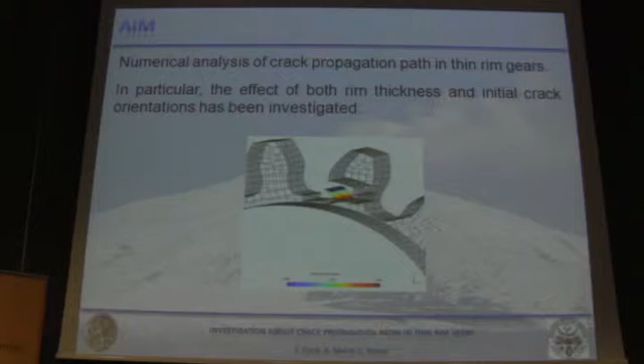This work deals with an investigation about the crack propagation path in thin rim gears in order to approach the fail-safe design. In particular, the effect of some geometrical parameters is investigated.

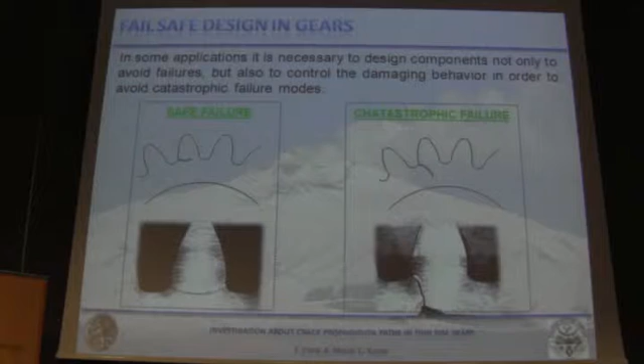Fail-safe design is a design approach where if a failure occurs, the failure should be as safe as possible. If we apply this method to design gears, in particular thin rim gears, we have two possible failure modes.

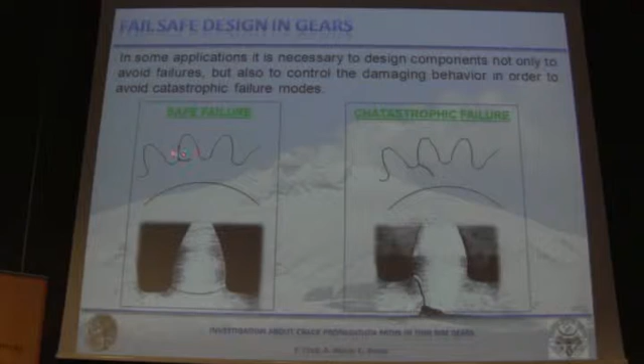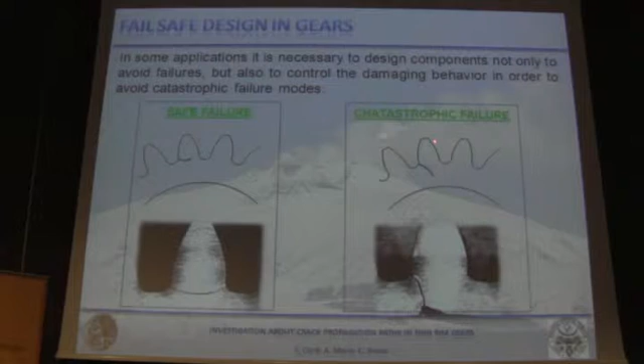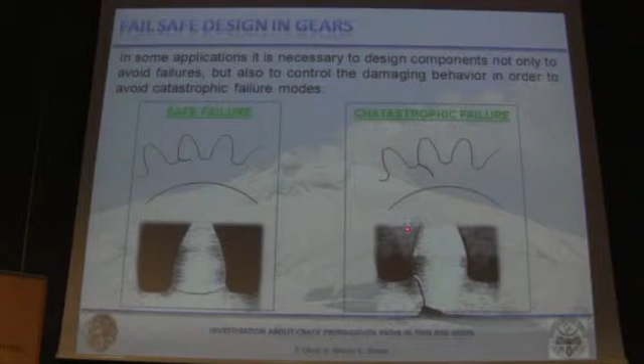The first one is the crack propagates throughout the tooth, and at the end the tooth is removed. The catastrophic failure mode is the crack growth through the rim, and in this way a big part of the wheel may be projected, and this may cause very big damage.

Here at the bottom you can see two images from the literature about experimental tests.

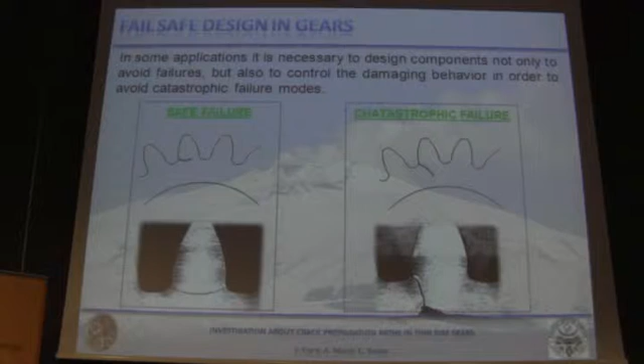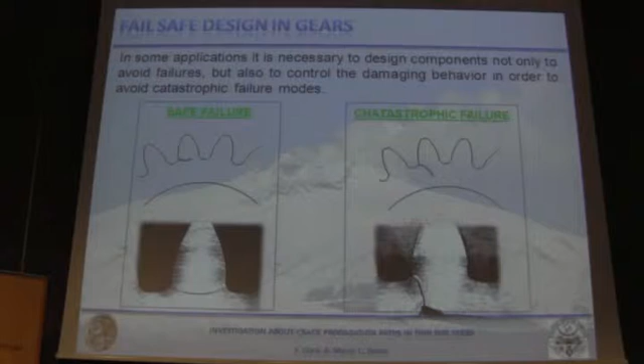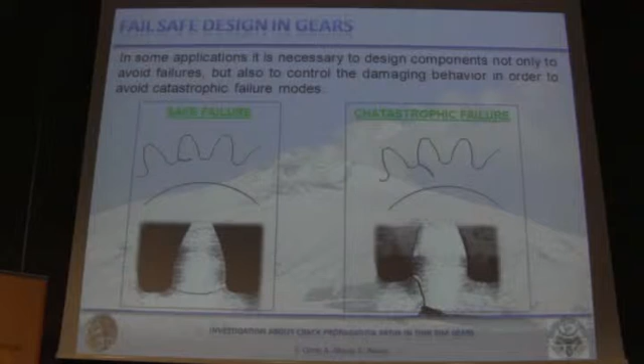Thin rim gears are particularly used in aerospace application because in aerospace field the weight is very important. So gear makers try to remove as much material in order to decrease the weight.

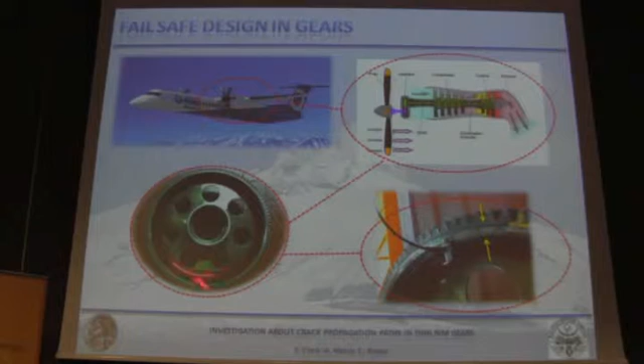Because maybe not everybody knows that in airplanes there are many gears, and they play a very important role. I give you just two quick examples. The first one is this gear.

This gear has about 300 millimeter pitch diameter and has this very little rim thickness, about less than 10 millimeters. This gear is mounted in this gearbox. In this gearbox power the propeller of this airplane.

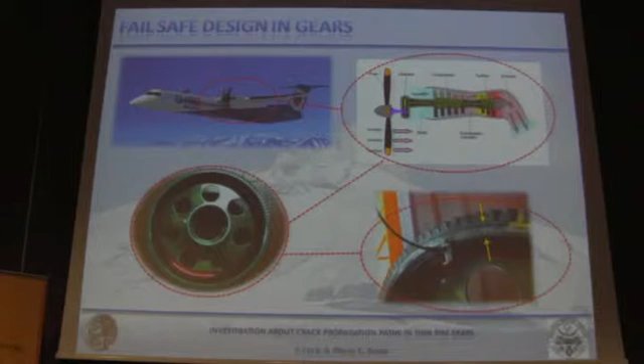Another example is the new generation low emission and low fuel consumption engine, the so-called geared turbofan. This is a turbofan engine with a very big fan, and the connection between the turbo machine and the fan is allowed by a reduction gearbox, this one.

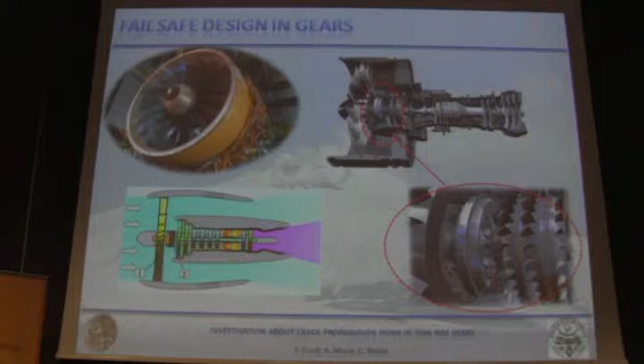So in airplane engine and also in a helicopter engine we have to pay attention to the gears failure mode.

Coming back to this work, the main parameters influencing the crack propagation path are the rim thickness, the web thickness, the initial crack position. The initial crack position may change according to the gear speed.

Generally speaking, if the wheel speed increases, the nucleation point becomes lower, going from the bottom to the tooth root to the downside of the tooth root. And also the crack orientation may affect the crack path.

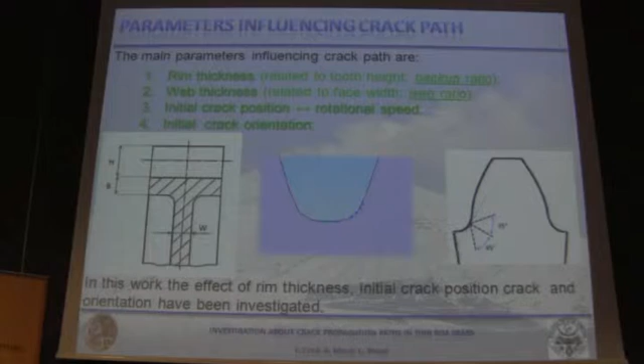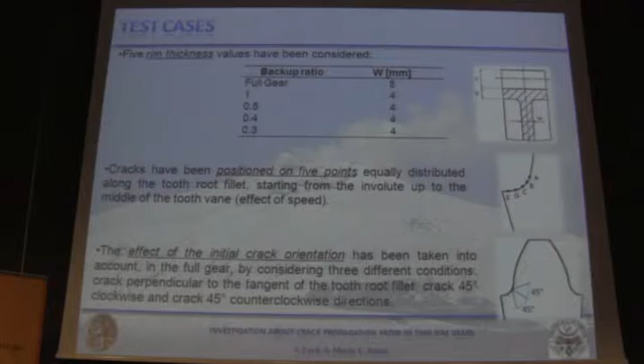In this work, only the rim thickness and the initial crack position and crack orientation have been investigated. So, concerning rim thickness, the rim thickness and the web are both related to the gear dimension.

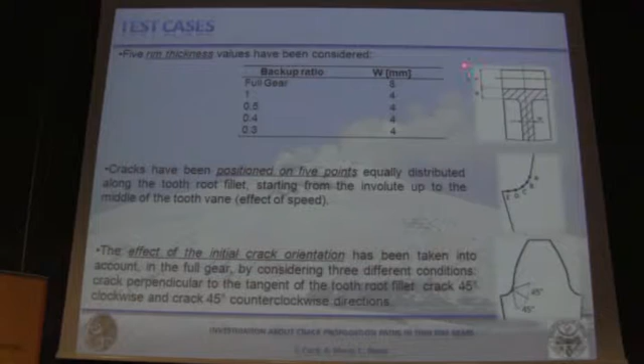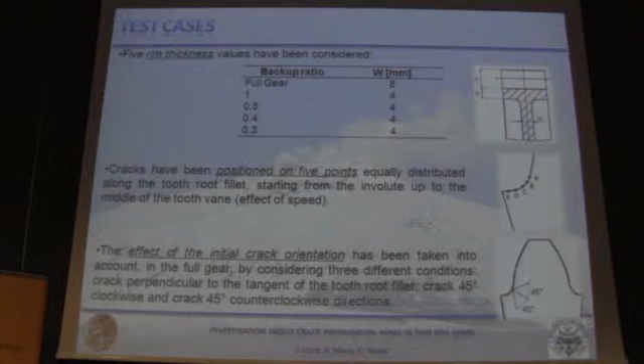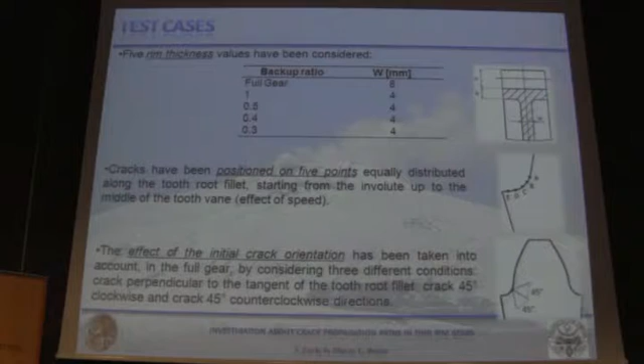In particular, the rim thickness is related to the tooth height, because this geometrical effect influences the gear relatively to the other dimensions. I mean, we can't say that 10 millimeters rim thickness is too much or too low. It depends also on the tooth height and on the other gear parameters.

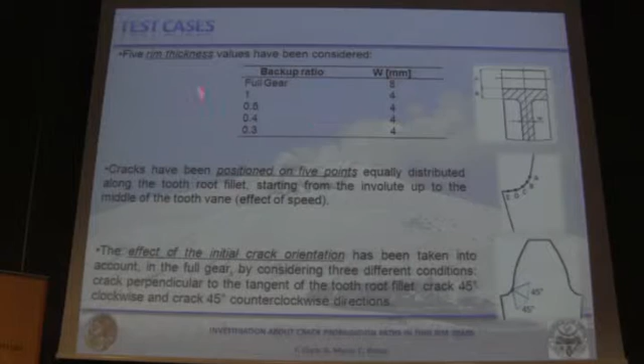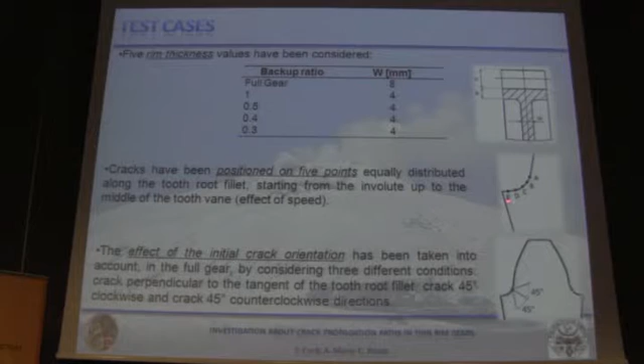So we consider 5 rim thicknesses with 2 web thicknesses, 5 initial crack points, and 3 initial crack orientations.

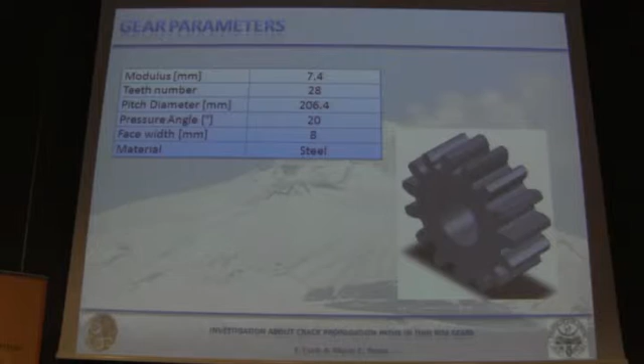So this is the test gear. It's a little gear, 28 teeth, about 200 pitch diameter, and this investigation has been done with the XFEM method.

XFEM stands for extended finite element method. The extended FEM consists in elements with enriched shape functions. This method was invented, we can say, more or less 10 years ago, and now some commercial codes implement this new approach.

The main advantages compared to the classical FEM method are that the crack is, we can say, mesh independent, because the crack may grow through the middle of two nodes. So we don't care about the position of each node, because the crack may cut the element. We don't need to remesh at every calculation step, and we don't need to mesh the crack tip with particular elements.

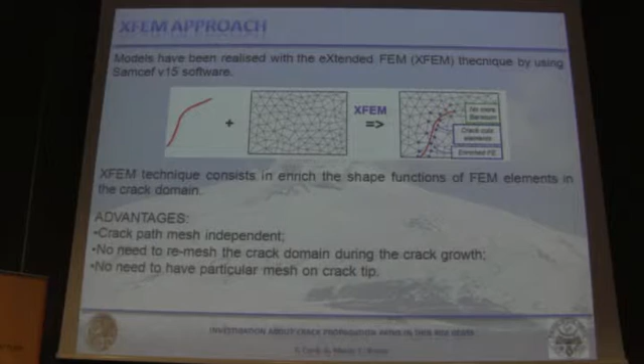Just a quick view about the model creation. We start from a traditional FEM model. We have the gear already meshed with the loads and the boundary conditions assigned.

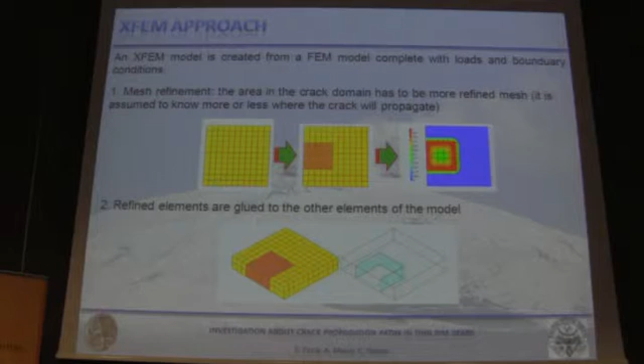Then we make a mesh refinement in the region we suppose that the crack will grow. Then the new elements are glued with the other elements.

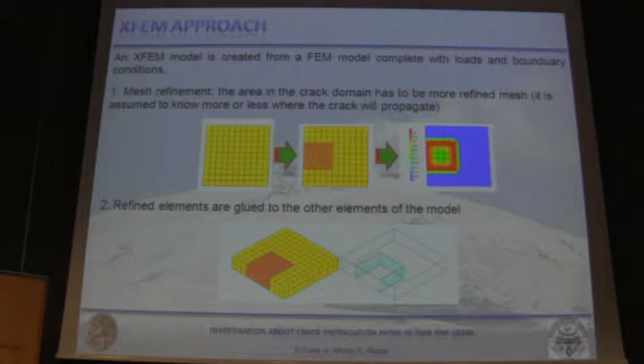Then we insert the initial crack. In the software we used Samcef, Siemens Samcef, it is possible to insert a rectangular crack or elliptical crack. Then we define the enrichment radius, and at the end we check the model and we can run the simulation.

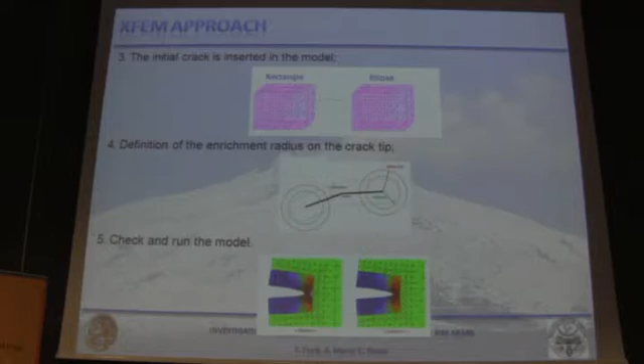Then the boundary condition: we clamped the internal diameter of the wheel, and we applied a force distributed on the tooth width, located at the pitch diameter.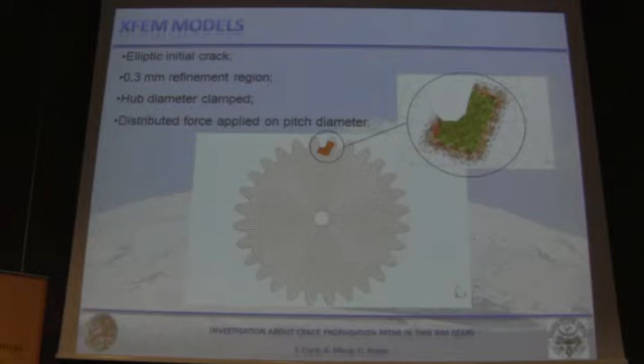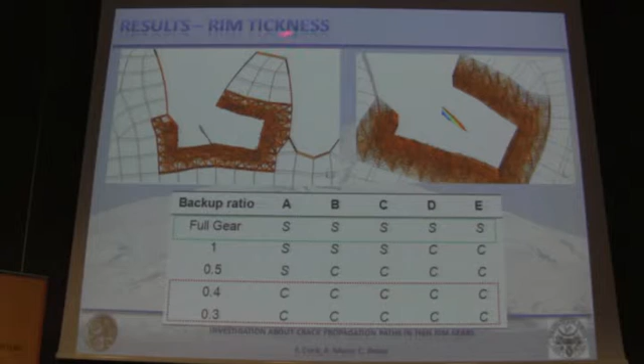Okay, here are some results. Considering the rim thickness, in this table S stands for safe failure and C for catastrophic failure. Here you can see the catastrophic failure path, so the crack growth through the rim. Here an example of safe failure, the crack grows through the tooth.

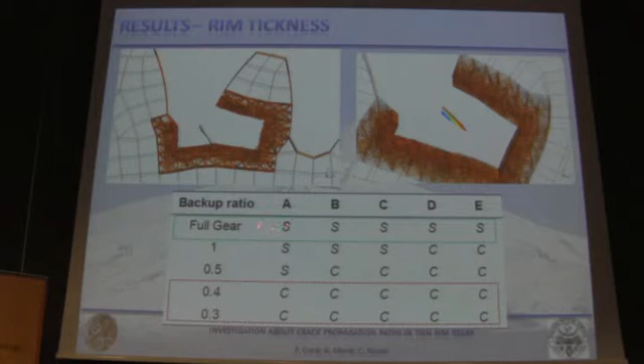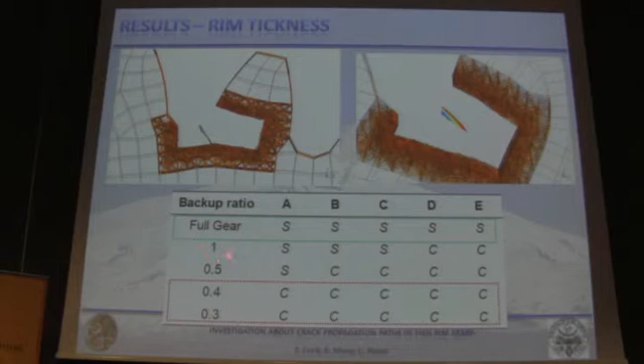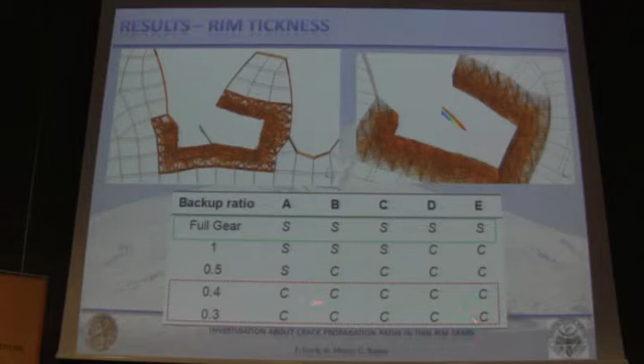So in this table, A, B, C, D, and E are the initial crack positions, and here you can see the backup ratio, that is the ratio between the rim thickness and the tooth height. What we can see is, if we consider the full gear, so the entire gear, the crack growth always through the tooth. If the rim thickness decreases, the failure mode depends according to the initial crack position, and if we consider a very thin rim, the crack always goes through the rim.

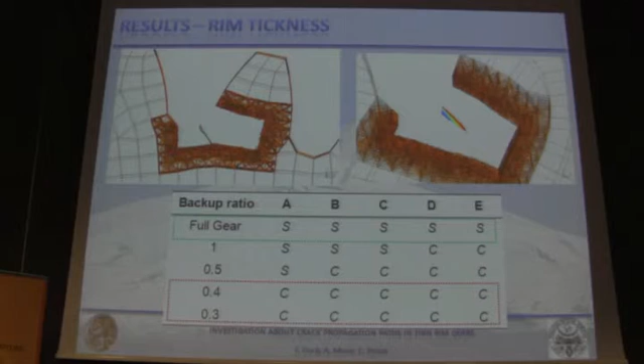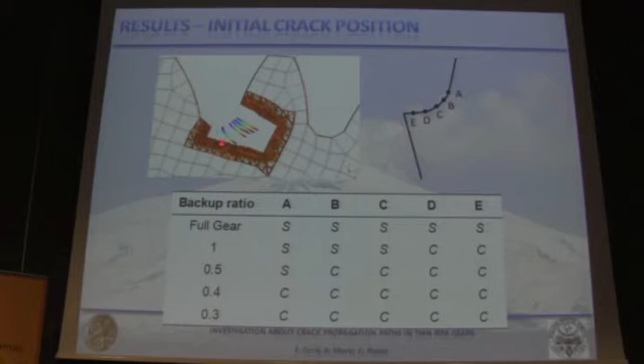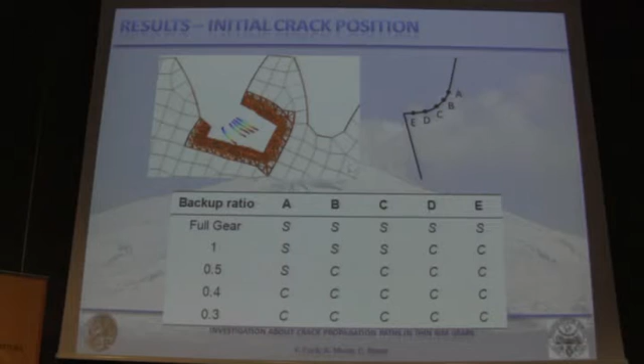Considering the initial crack position, here it is not multiple crack, it's just one plot with 5 results plotted together. Here you can see the initial points, here the crack path. You can see that the crack path changes according to the initial crack position.

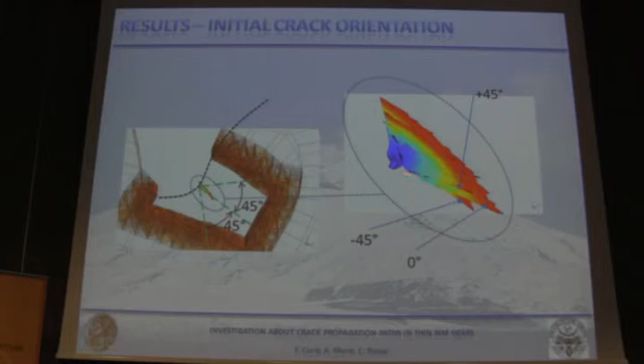Then, considering the initial crack orientation, we selected 3 initial orientations. The first is perpendicular to the tangent plane, tangent to the tooth root. Then we selected 45 degrees up and 45 degrees down. But what we found is that the initial orientation seems not to affect the crack path.

Conclusions. First of all, this is just the beginning of a more deep investigation we have to do. But what we can conclude is, first of all, we used for this the first time in our group's experience the XFEM technique, and by comparing our results with the literature, it seems a good method.

The rim thickness and the initial crack position affect the crack orientation, the crack path, and the initial orientation of the crack doesn't affect the crack path.

What we found is that we can't take each geometrical parameter alone, but it seems that each geometrical parameter affects the crack path also with the effect of other parameters. So not only the rim thickness may be taken into account, but if we want to perform a fail-safe design, we have to consider multiple parameters together.

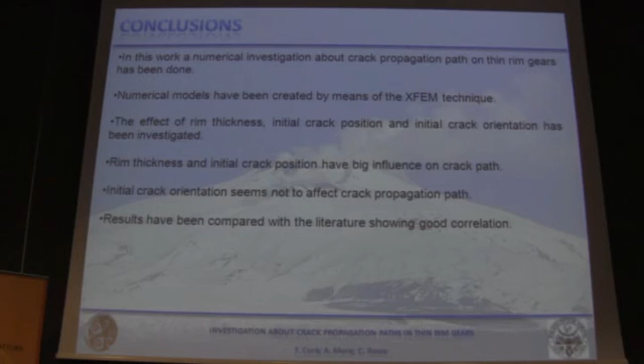So, as a future development, we have to investigate in a more deep way the parameters already studied, but we also have to add the effect of web thickness, and insert the effect of the speed, because the goal of this research activity is to define a design criteria to allow fail-safe design of thin rim gears.

So we want to find a parameter that, if respected, means the gear, if it fails, fails in a safe way. Okay, thank you.